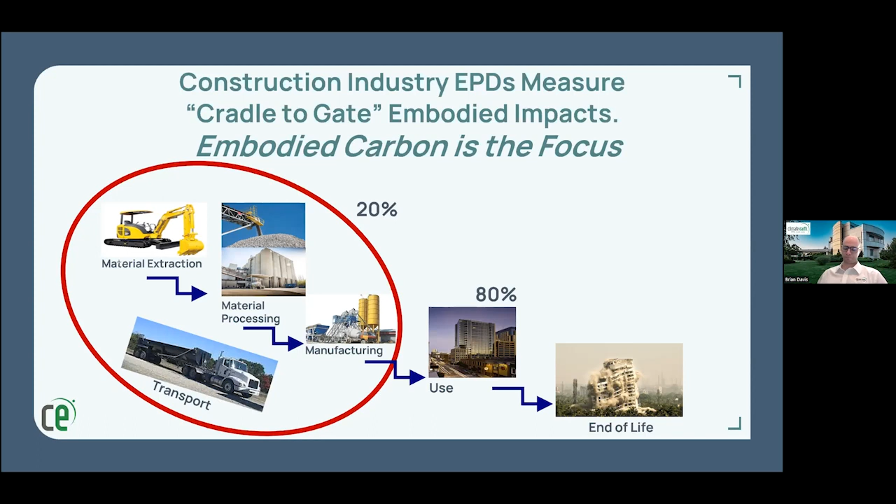So concrete producers in North America will be, or already have actually, transitioned from a traditional market to one in which global warming potential is seen as an equal buying metric. Your traditional criteria was strength, workability, and durability. It's transitioning to where GWP is considered an equal buying metric.

Our mission at Climate Earth is to provide you with tools so you can see where the impacts are and help you to refine a design to meet specific thresholds that are put in place. Our goal is we want you to thrive in this new market of low carbon construction. Utilizing our services, we hope to help you be competitive or win more profitable bids, and you can use it as a tool to become a market leader as well.

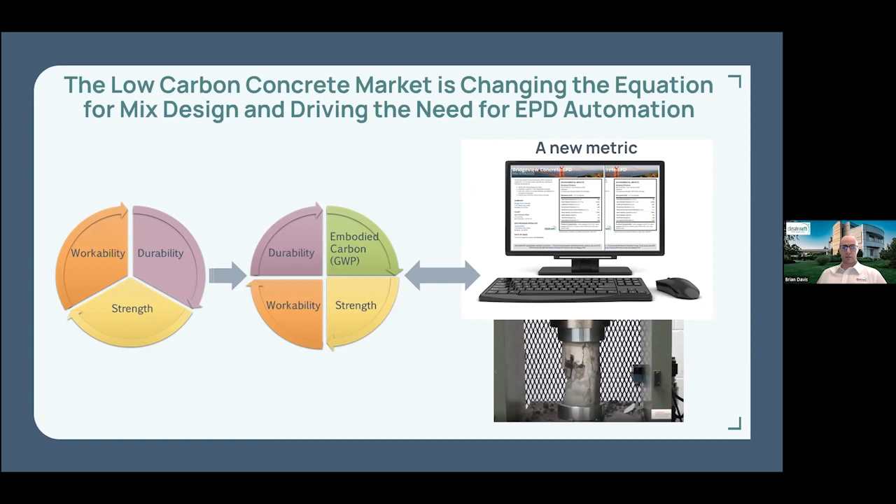So what's driving EPDs? What's driving GWP as being a specification criteria? Well, in order to reduce embodied carbon, designers, developers, architects, project managers, they need to know what the carbon footprint of the material is. Starting in January 2023 and refined in May 2023, federal Buy Clean legislation is looking to require Type 3 product-specific EPDs for projects in which federal funding is involved.

This table to the right is actually a table published by the General Services Administration, maximum limits of GWP, global warming potential, for concrete used on publicly funded projects. What you would see is a 5,000 PSI specified concrete strength class. The GWP for a top 20% producer would be 305. GWP for a top 40% producer would be 357. And then the better than average limit is 382.

So this is basically your good, better, best, where I also was on a call with the GSA back in July, and they kind of described it as a gold, silver, bronze type category. We've seen this being adopted by private companies as well. Robert mentioned that. So your Googles, Amazon, Facebook, Metas, they've all decided to put extreme importance on carbon budgeting for their projects, GWP thresholds. I mean, we see it. I think we just have to realize that GWP and EPDs are becoming normalized as another bid selection criteria.

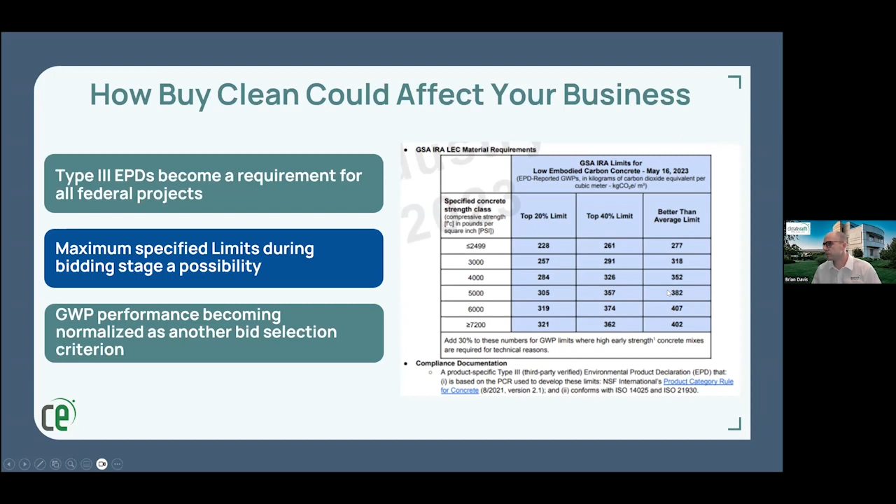A 5,000 PSI mix needs a top 20% producer number of 305. 357 is silver, 382 is bronze. So let's go back and see where we're at. All right, we're at 374. So we're at a spot that's in between the bronze and the silver.

What can we do here? Well, there's a couple things. So this is 374 GWP per cubic meter of concrete. So maybe I want to refine this a little bit. A lot of people use a 1L. So I go back and I supplement the type 1-2 with a type 1L cement.

Now, a disclaimer, obviously, your mix design is a proprietary mix design. All this is held within the system. This is never going to be listed on the EPD. We'll go back to calculate. All right, perfect. So we took it from 374 down to 347.

Satisfied with that, but maybe we want to see, okay, well, how do we hold up to industry average? Well, that's perfect because I have a benchmark right here that'll show you where this mix design compares to the industry average. So the industry average for a 5,000 PSI mix design in San Francisco is going to be 378 GWP. The mix design that I'm running in this test function right here, 347. That's 8.17% below industry average. So that's fantastic.

I have the ability to download this as a JPEG. I can download it as a PDF, or I could print or view in full screen if I wanted to add it to a PowerPoint presentation. Close this out. All right, so 347 is good, but maybe we want to try to get into that top 20%. How would we go about doing that?

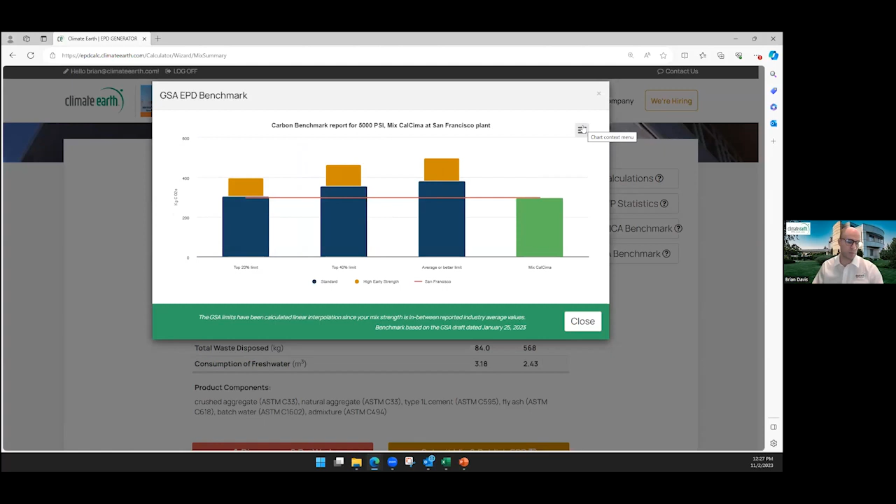So again, you can download this as a JPEG, you can download it as a PDF, you can print it, whatever you like. So this is fantastic. So we love that number. How did we get there? Like I said before, statistics. This is a full-on breakdown of all your global warming potential per section. So this is material, this is my transport, this is my manufacturing, and this is my total.

The reason this is important, the reason this is good, I can kind of find out where hotspots are. Maybe, all right, I've done everything as far as mix design that's capable to bring this GWP number down, but I still want to get lower. Maybe I start looking at my transportation metrics. Right here, crushed aggregate has a GWP of almost 28, where everything else is in single digits. So maybe that's telling me that I'm bringing this crushed aggregate in, and I should look for a more local producer to lower that GWP number. All right, perfect. So informed decisions as we try to bring down our GWP.

Like I said before, if you're satisfied with this 297, but you didn't necessarily want to publish an EPD right away, we have the ability to save this mix as a draft. We just implemented this new feature at the request of a client of ours. And they said, we'd love if we could show a mix design draft, which is a one-page document. I'll show you here in a second. We'd love if we can show it with and without a mix design.

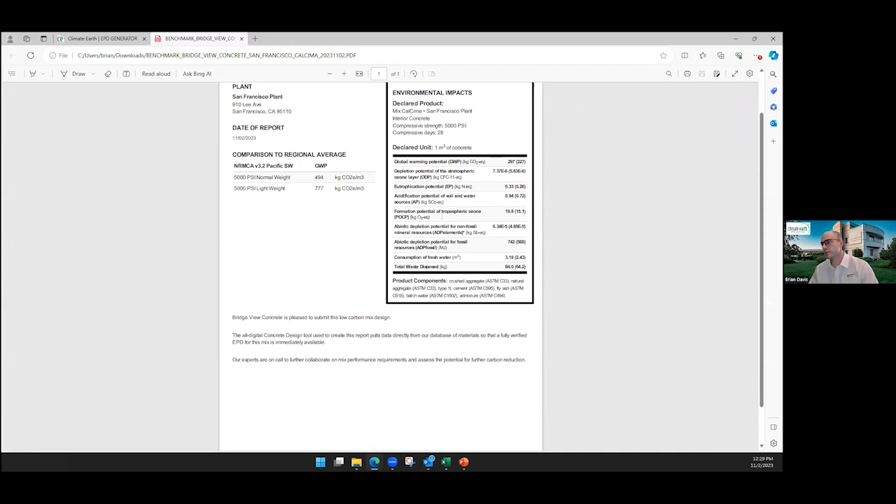So it shows what plant it's coming from. It'll show you the date of report. It'll show you the comparison to the regional average, and then it has a full-on breakdown of the nutritional label. GWP is specified in cubic meters, but at the request of our clients, they'd like to see that number in cubic yards. We include it as well. So this is just a one-page internal document. You can put the mix design on here. You can submit it without the mix design, whatever you prefer.

Let me go back quick. Now, the reason I did that is I wanted to show you something. I just created a draft mix design. I just did it. You saw me do it. I go back to San Francisco plant and I just search draft.

Now, what I'm looking for is right here. I just created this mix design report and it's already available in EPD lookup. So I'm satisfied with that mix. The 297 was a great GWP. I'm ready to publish this thing. I don't have to do anything but click here, find it under EPD lookup, and click publish.

It'll give you a quick shot of the nutrition label, what your global warming potential is, what your acidification is, consumption of fresh water, and smog factors. It'll tell you the product components of the mix design. I love everything about this, so I'm going to hit submit mix and publish EPD.

Click of a button, we have a type 3 product specific EPD that's been externally verified. It gives you the company, the plant, the program operator, which will be your verifier, the date of issue, and the validity. Over here is our GWP. A little bit more information.

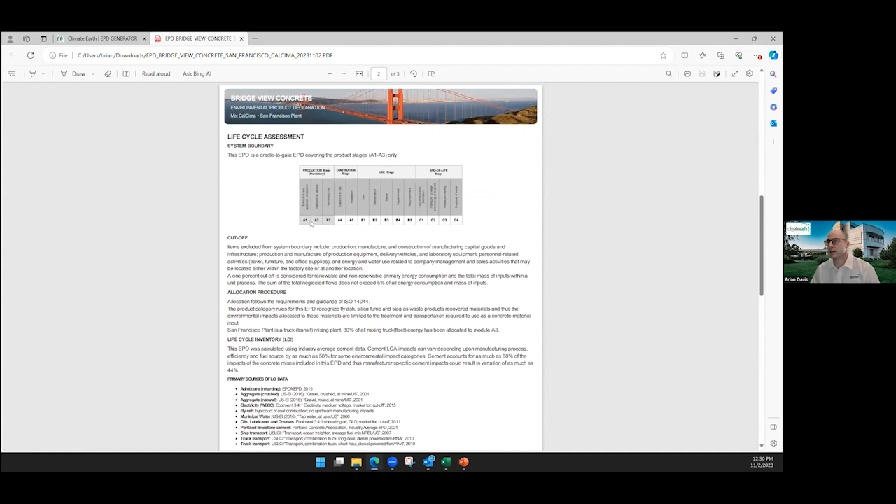The life cycle assessment system boundary, like I said, it's A1, A2, A3, so material, transport, manufacturing. And then our final page is a full-on breakdown of the environmental indicators from the life cycle assessment study.

Now, I take you through that because I just wanted to show you how easy it is. If you were ever concerned about what would be necessary to create EPDs, I just showed you software that has point-and-click functionality, and you can create an EPD with the click of a button. Now, how do we populate that? Well, that's where I'm going to turn it over, and I'm going to let Hossein take it from here. He's our life cycle assessment implementation manager at Climate Earth.

Hossein, go ahead. Awesome. Thank you so much, Brian. I appreciate that. Can you guys see my screen with the PowerPoint presentation? We can. Awesome. Cool. So this is Hossein. Pleasure to meet you all.

And my job today is to describe how easy the data collection process is. So basically, myself and my team in North America are here to help you do the data collection. And every time we get a new customer, I always start with this timeline that shows the whole process of data collection. This is a rough timeline, and it's pretty flexible based on the availability of your time and data, and we can work together to just get it done, right?

So the first step when we sign a new contract is to kick off the project as soon as possible. After the kickoff call, we share with you some questionnaires that collect the company materials and the company supplier names. Easy. Then when you're done, I will check them all and directly import them into the system and immediately schedule a call with you to go to the next step, which is the plant setup. So now you have given us the name of your company materials and the name of your company suppliers. Now it's time to be more specific and assign them to each of your plants.

So I think Brian did a wonderful job describing the EPD layout. So I would skip these slides and directly go to the data collection piece. So data collection has 4 phases. Phase number 1 is collecting company materials, as mentioned on the timeline, then suppliers. Phase number 3 is to be more plant specific. And phase number 4 is how do you want to design your EPD? That's a marketing piece.

One thing that you need to keep in mind, we believe in follow-up meetings. So either weekly calls, bi-weekly calls, on-demand calls, whatever helps to do the data collection. We love to meet you, talk to you, via email, phone call, or Zoom calls. So we could help you estimate some numbers, find the right numbers, do the right allocations, and just get it as soon as possible. So that's how we do that.

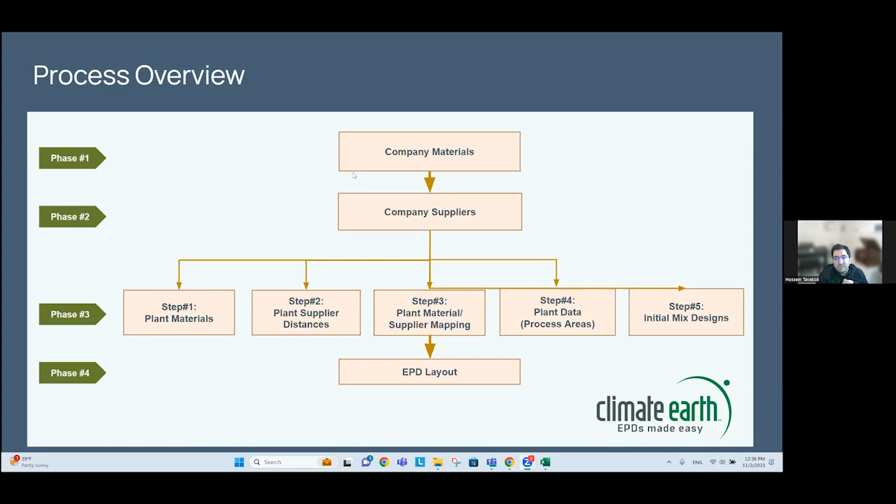And basically, you see a bunch of steps here, up to 10 steps to be taken care of. There are 10 tiny steps that we will do one after each other, and we will do it together. You're not on your own, I promise you. So let's review them. Phase number 1 is company materials. After the kickoff call, I will share with you an Excel file that has 2 sheets. Sheet number 1 would address phase number 1.

It has only 3 columns, and all you need to do is to copy your internal material codes and names and types from your internal documents or third-party QC tools or whatever you have into this template. That's all you need to do. And I will just check it all and import it into the console.

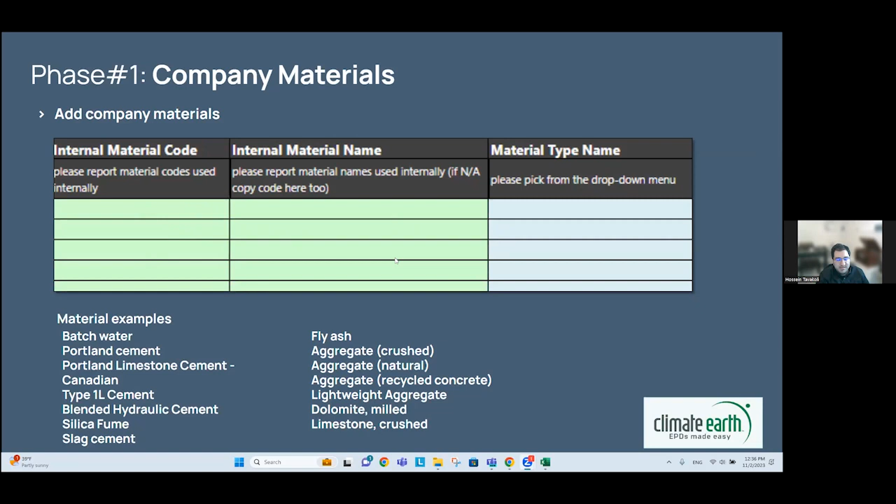Then we go to the third phase. With that questionnaire, we will be done with 2 phases. Now let's go to the third one. Be more plant specific. Now, as I told you, I have already imported the company materials and the suppliers. So it's time to assign the right materials to each plant. All you need to do is just to activate these checkboxes.

And if you use all of the materials that you have shared with us in this certain plant, that's much easier because you can select them all in one click and just click on save. 2 seconds of your time.

Then we have step number 2, which is the plant suppliers. That's the toughest step, to be honest with you, because you need to open Google Maps or some other tools like that to find the transportation distances, and that would take some time. So basically, for every supplier in each plant, you need to find the location of the supplier's manufacturing facility, and we have multiple transportation modes that you can have all at the same time, and you just need to find the distances through these online tools.

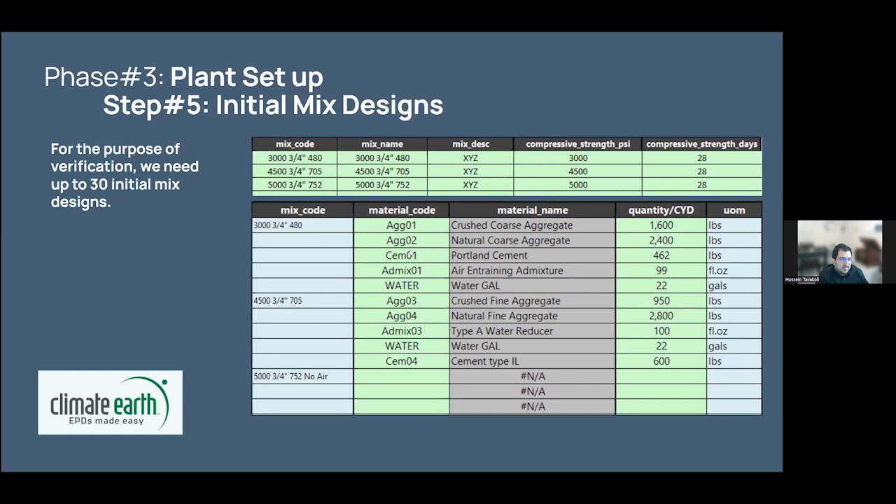Thank you, Hossein. That was highly informative. I think we'll move to the final piece of EPD creation, which is third-party verification. Matthew, would you like to take it away?

Hi all. First of all, can you hear me all right? Yeah, we can hear you. All right. And my next question is, can you see my presentation? That is correct. We can see your screen.

Perfect. Okay, I'm going to pick up exactly where Hossein left off on that helpful chart of timeline of work. The final stage in that was verification, as he mentioned, and I'm going to cover that. So here's a quick overview of what I'm going to be covering. How EPD verification works. I'm going to cover the state of verified EPDs in California and just give a little bit of a look at the market. And then finally, a market perspective from the viewpoint of a concrete producer.

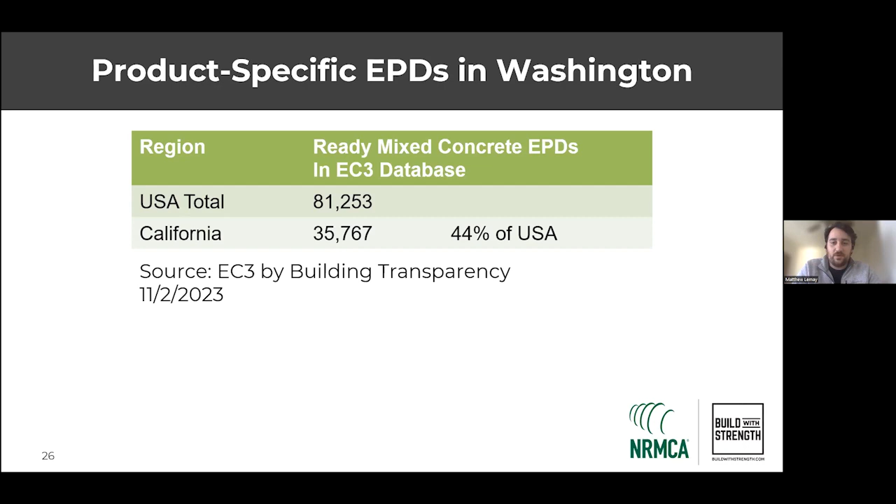Just to give a little bit of a picture of what the mix designs look like and what the GWP looks like, these stats come from the industry-wide EPD. That is a separate document, which I won't get into today, but we have lots of information about it on nrmca.org that NRMCA publishes. Essentially consider it a survey of standard industry practice across the board so that we're able to gather, okay, when you're compared to a benchmark, what is that benchmark? That's what the industry-wide EPD and regional benchmarks produce.

We break the country down by region. As you all know, concrete is a local material. It's dependent on local supply. So you're only able to mix and to design what you can source. So each region is going to have different typical or industry standard, kind of standard practice mix designs.

I just want to point out, this should say Pacific Southwest, that in this region, the national average has about 18%. I'm using 4,000 PSI concrete because, according to at least our data, it's the most common specified by volume, the most common strength. So 4,000 PSI concrete, your average cubic yard of it is going to have about 18% of its cement replaced with SCMs, or supplementary cementitious materials, nationwide. In the Pacific Southwest region, that's actually going to be lower at around 12%, 13%.

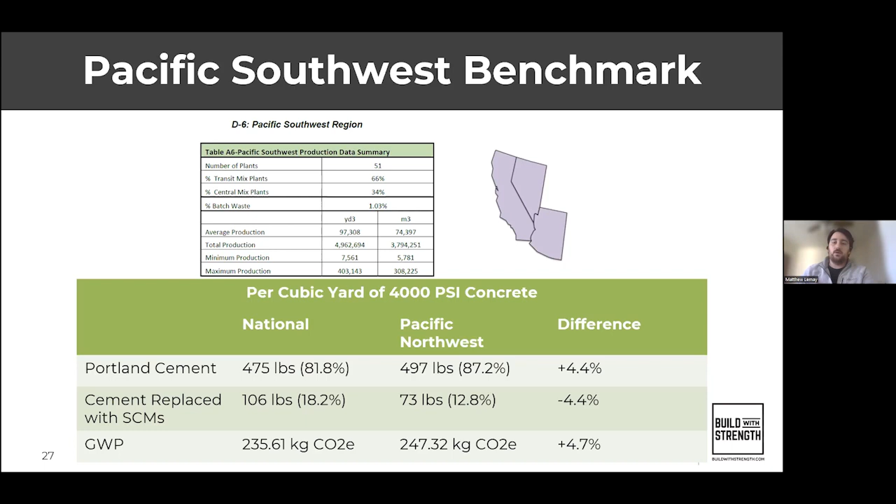Which means that if you're able to really push the boundaries, get the low GWPs, control all of your levers in terms of mix design to do so, you're going to see a greater reduction from benchmark in this region than if you were compared to the national, for example, because that GWP would be down here. We think it's, right now, a distinct advantage, and wherever we have the chance to advocate for it, NRMCA advocates for using a more local benchmark versus a more dispersed national benchmark because it's simply more accurate to the standard business practice in the area.

Finally, some more drivers of the uptake of EPDs. We're really seeing it driven by the design community, architects and engineers, through these challenges, which themselves are based on the Paris Climate Accord's CO2 reduction targets, right? These are just targeted toward the building sector. Architecture 2030 wants new buildings, developments, and major renovations to be carbon neutral by 2030.

The AIA 2030 commitment is a little bit different. I don't think it has a strict target, but many architectural firms and owners have signed on to this. And the SE 2050 challenge has another different deadline, for net zero structures by 2050. All of these are really driving the use of GWP, the use of measuring GWP through EPDs in the market, and that's why we've seen such an uptick.

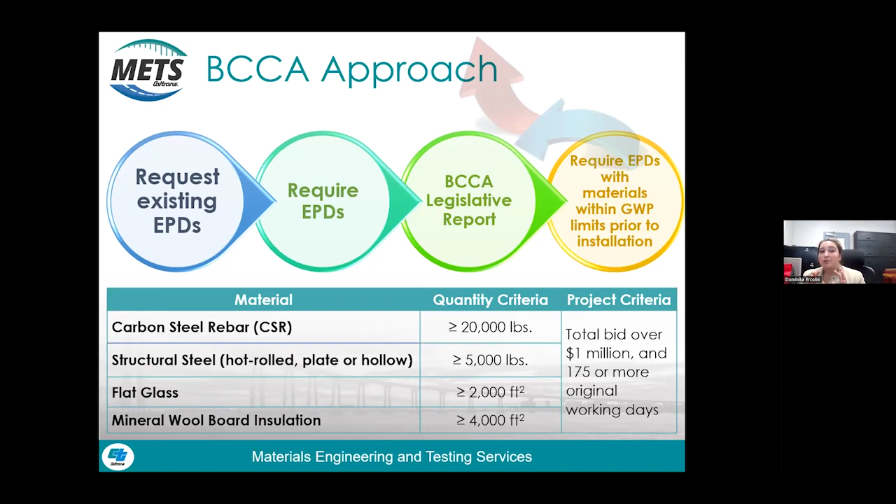Another thing that we did with the Buy Clean California Act that we intend to continue doing for new materials as we incorporate them is our data collection system. So we use an internal database that we call DIME, and this is where we store all of our EPD data, as well as where the contractor goes to submit the quantities. And it's intended to be a quite simple process. You look through, you find your EPD, and then you type in how much of the quantity you've shipped to the job site. So we think that system works quite well, and we plan on doing that for future materials.

One thing that we plan on doing differently: we've developed an authorized materials list for our structural steel and carbon steel rebar. And so that makes it easier for our contractors and our resident engineers or our construction staff to look up and find the various available mills. But because we're looking at additional materials, like asphalt and concrete, there's so many more mixes. So we're probably not going to take this route this time. It'll probably all be managed through DIME.

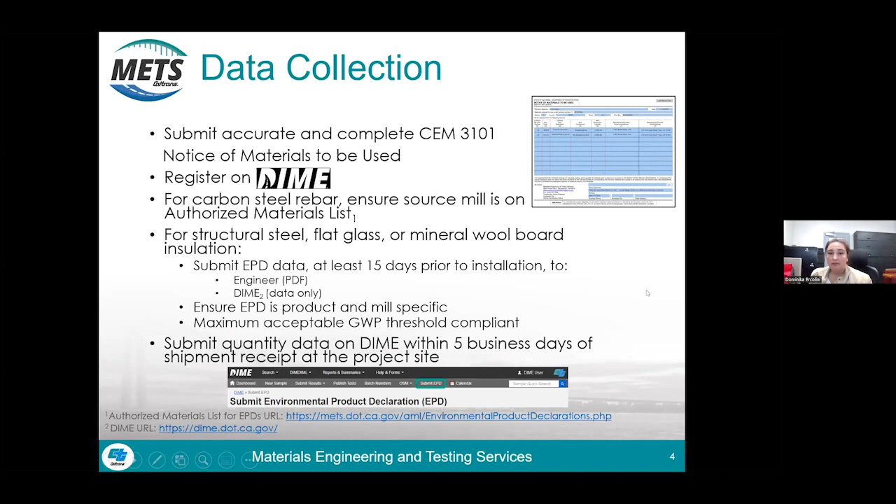In 2019, we did some pilot projects, and we piloted 7 materials that we collected EPDs for. 4 of them were the ones that I mentioned before that were through the Buy Clean California Act: structural steel, carbon steel rebar, mineral wool board insulation, and flat glass. And then we also did 3 additional self-piloted materials that were selected because they're high volume construction materials, so concrete, asphalt, and aggregate.

Especially at this time, we had a feeling that there were going to be more materials added to the Buy Clean California Act, and these 3 materials were the ones that made the most sense for them to target next. And so we really wanted to get ahead of the legislation so that we could take a look at the issues we're going to run into, so that we can better help support our legislators when we see these proposed legislations come through.

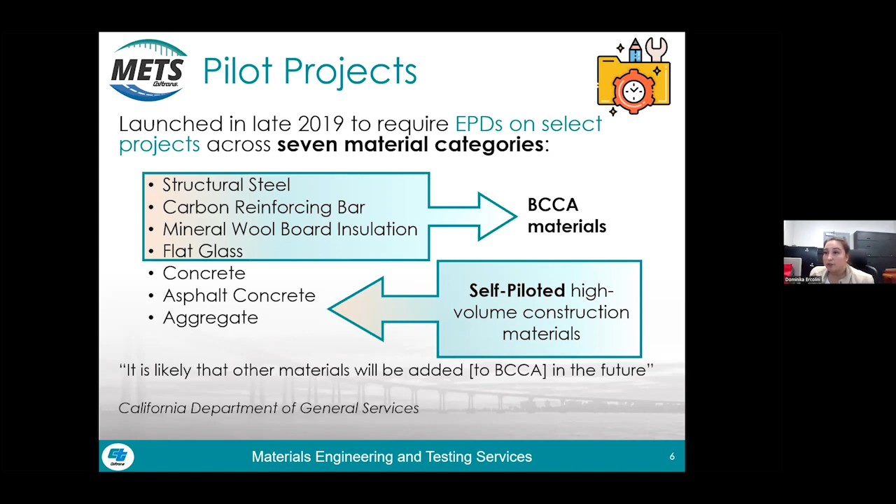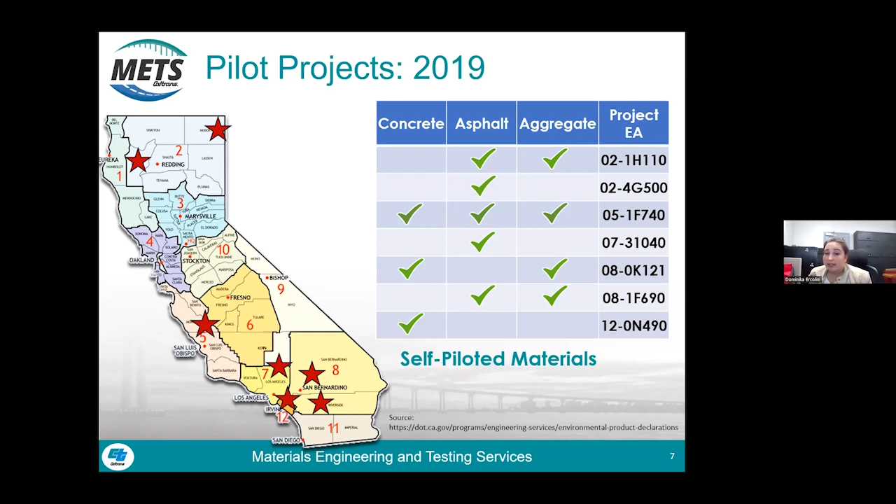And we see them. Since the Buy Clean California Act went into legislation, we've seen proposed legislation for these types of materials: concrete, asphalt, and aggregate. Although I haven't seen one actually go through all the way, if we're seeing it proposed, there's a good chance that they might be interested in doing that in the future. And so we had 7 projects. 3 of them required concrete EPDs, 5 of them required asphalt, and 4 of them required EPDs for aggregate. And we learned quite a bit through that process.

One of them was in regards to data collection. We learned that in our DIME system, we were labeling everything the same way, and we realized that different PCRs label things differently, and so we needed to make a custom user base for each of the different PCRs to make it easier for the folks that are inputting the data.

We learned that expiration of PCRs could happen, right? It did happen. We had a PCR that expired and then was not replaced. I believe it took them like 3 months to do that. And so we had to figure out what to do, and essentially what we ended up on was we just don't require EPDs. If there's no valid PCR, it's not fair for us to require an EPD if no one can make a new one during that time frame.

Roles and responsibilities. Keep in mind this was 2019, and so a lot of contractors didn't even know what an EPD was, or where they get one from. And so we learned that we needed to do a lot of communication, and a big thank you to our industry partners who do a lot of this communication on our behalf, educating their members about what EPDs are. And we ourselves do a lot of outreach as well, from the contractor all the way down the supply chain to where we're actually trying to get the EPD from. So communication, lots of communication until this gets completely normalized.

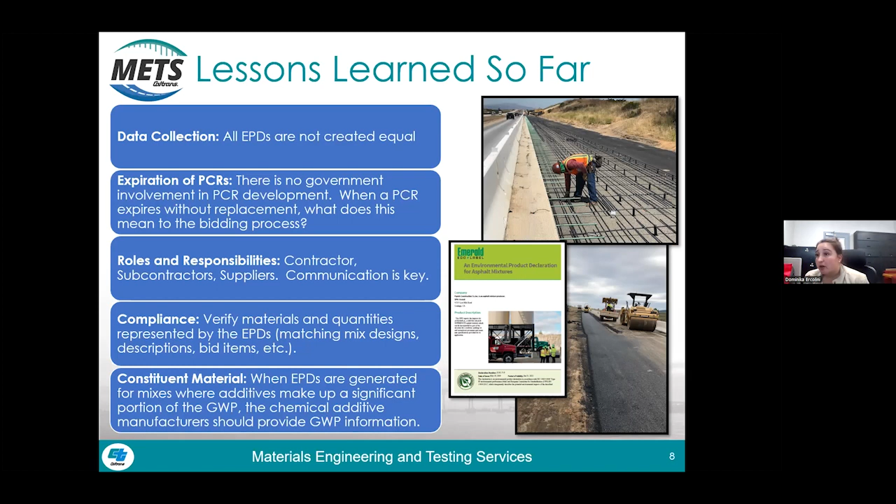For Every Day Counts, for those that are not familiar with EDC, this is something that FHWA does every couple of years. They take a look at the different technologies that maybe are being underutilized in the US, and they pick out a few of them, and then states participate to implement or incorporate those innovations into their specifications. And for this particular set, 2023 to 2024, we're looking at EPDs as one of those innovations, and Caltrans is participating.

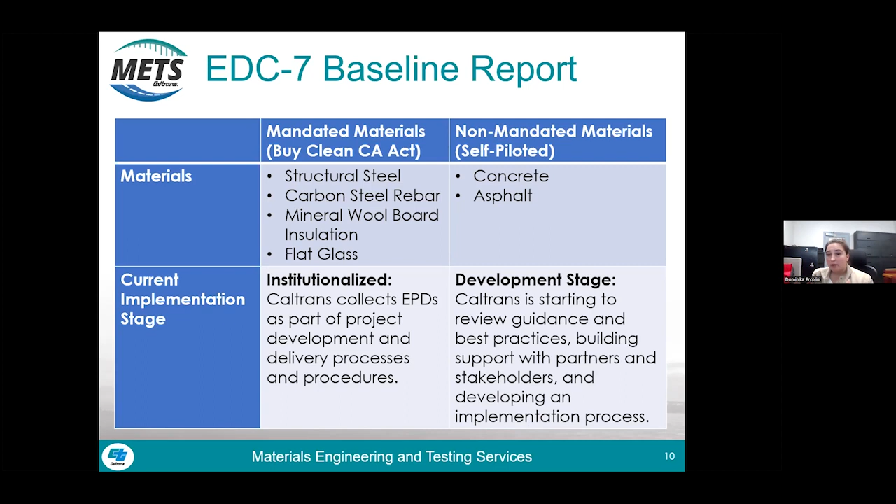As far as our goals and where we want to be, for the Buy Clean California Act, it's mostly just improving our specifications, making it as simple as possible administratively to incorporate the EPDs into our projects. On the concrete and asphalt side, however, we have a few more goals. One of them is the FHWA Climate Challenge, which I'll talk about a little bit more in just a minute. We also want to develop some draft specification language where we're incentivizing GHG reduction.

We also want to encourage the use of facility-specific raw material data. And what that means is, for your aggregate, are you using your actual supplier of aggregate as part of your EPD, or are you using an industry average? And of course, we know that depending on what's available, you're going to use the best thing that you have available, but we're really trying to encourage using as much as we can the facility-specific raw data.

We also want to support small businesses, and that's going to be through a lot of outreach and training and really communication of any financial incentives that are going to be out there. And then our last bullet on here, but really probably one of the most important ones, we would like to incorporate EPD requirements for concrete and asphalt by July of 2025.

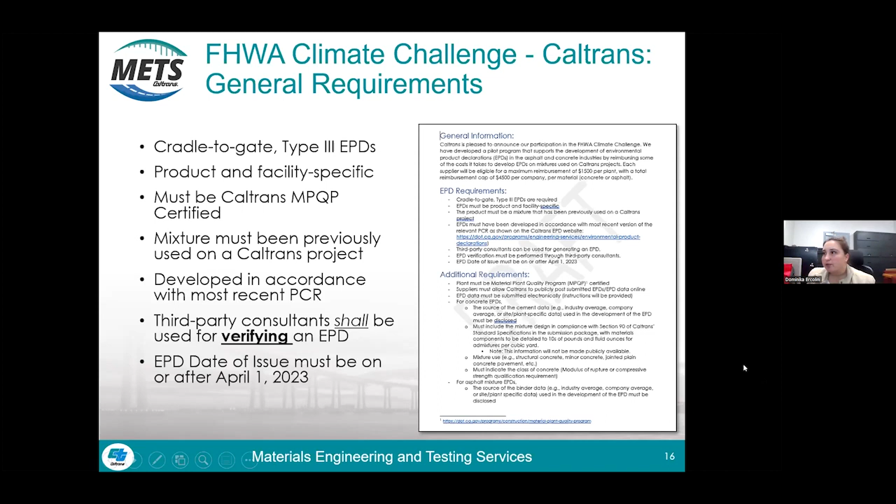We do have some additional requirements. One of them is we want to know the source of the binder or the cement data. And what we mean by that is are you using an industry average, or are you using the actual specific information from a specific cement manufacturer? And the reason for this is it allows us to understand the data a little bit better. I mentioned earlier the mix design, we do require that. Again, we're not going to be sharing that with the public.

And then we need to have the reimbursement package, so your EPD complete by December 31st, 2024. And that's because we have to use the funds within a certain time for FHWA. And so that's why we selected December 31st, 2024.

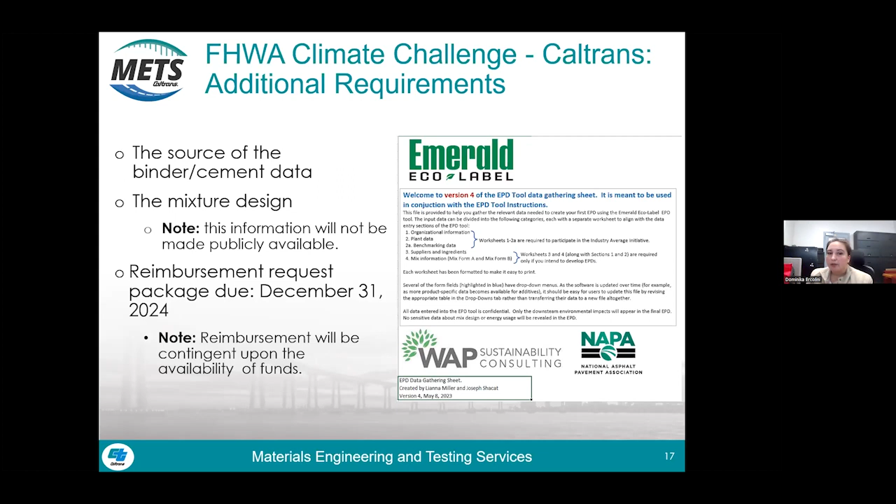We're just looking at the manufacturing of that material. We're not looking at the whole life cycle. But what we would like to do, and why we really want to put a focus on EPDs, is because EPDs are a big part of that whole life cycle, and we want to get data that's as good as we can get it before we start looking at the whole life cycle.

And so our future goals, we're trying to get towards that life cycle, so we can see not only what it takes to make that material, but then what does it take to maintain that material, as well as other factors. And that's what the life cycle does.

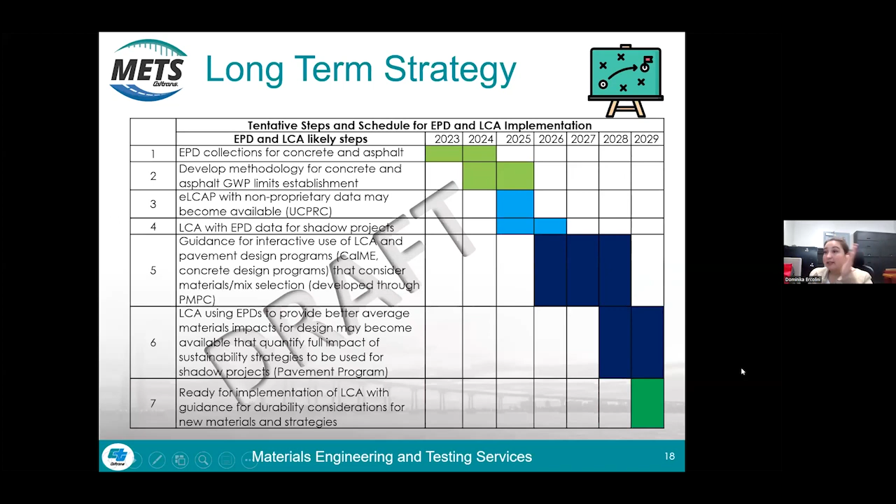We have a long-term strategy that is live, right? Where if we need to change directions, that's what we're going to do. Everything is new. We're new to this, and we're trying to figure it out, and that's why we're working through our PMPC group, so that we can work together to figure out what works and what doesn't. And then everyone plays a role in the successful implementation. We can't do this without you guys and your participation.

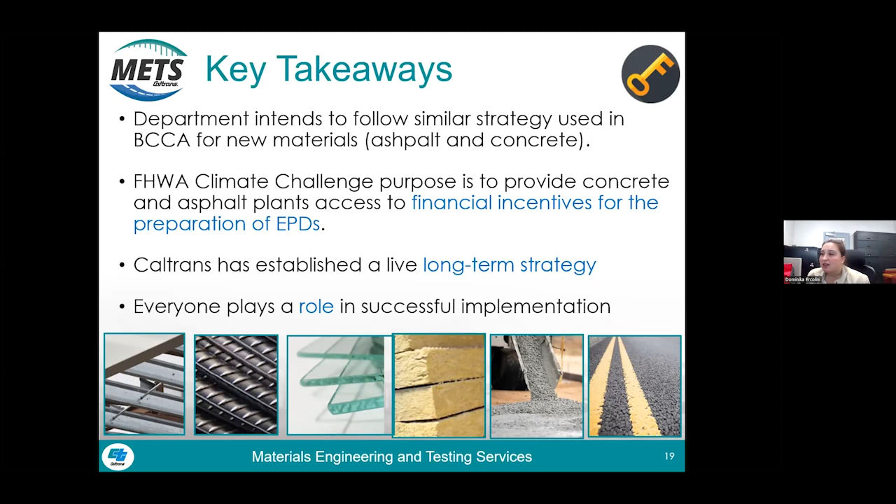And while you guys are taking a look at that, let me ask a couple of questions of Dominica. So right now, Caltrans is slated to require, correct me if this is accurate, EPDs mid 2025, correct? Correct. We have our 2025 specifications, and they would be incorporated into that round. But you're willing to accept them now, right? And create the body of knowledge. Yes. Which is something we're encouraging as CalCIMA, is for producers to get them in, right?